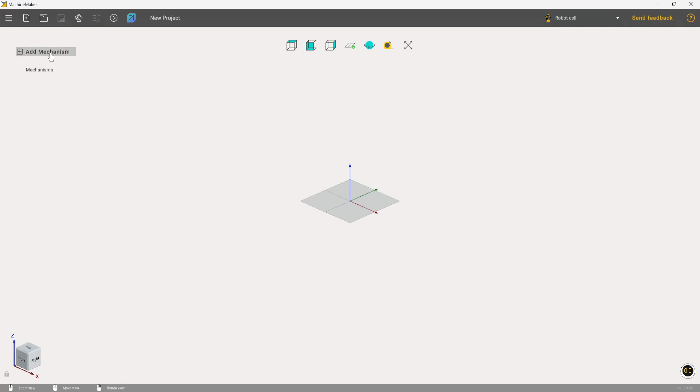For this, we need to launch Machine Maker. After launching, we need to add our robot. We click on Add Mechanism, Robot and Palletizing. Here, upload the file and select the 3D model of our robot.

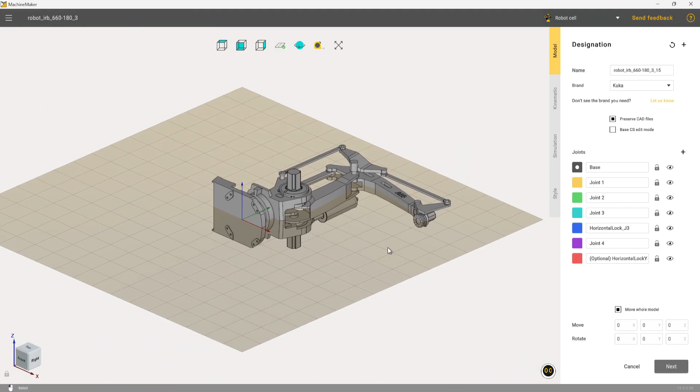If the 3D model loads in this form, we need to rotate it to the orientation we need. Then we will immediately add several axes that we will need later.

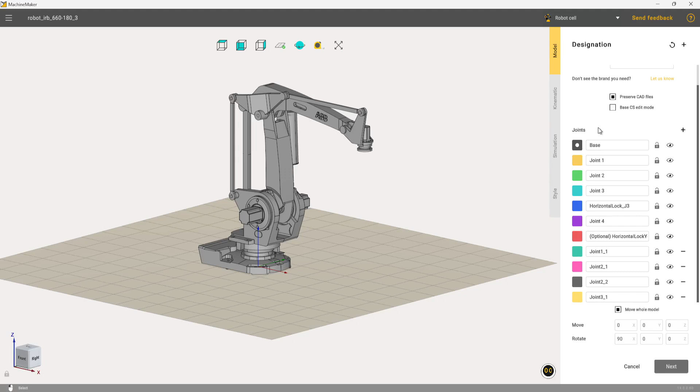Let's start with the base. This will be the bottom part of our robot, then the first axis, the second axis, and so on.

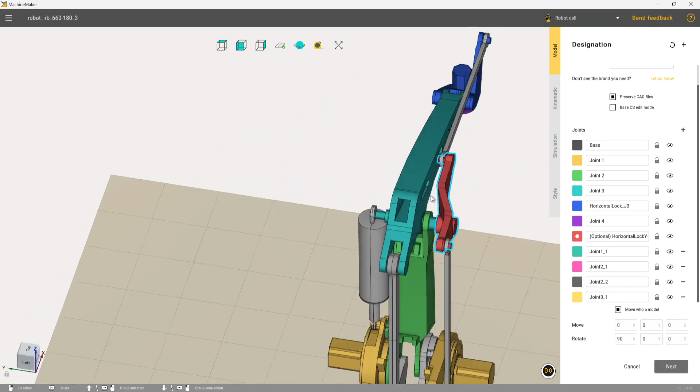After that, we will use the axes that we added. This will be this part of the robot. Then, joint 2.1.

Our robot is basically ready for further work.

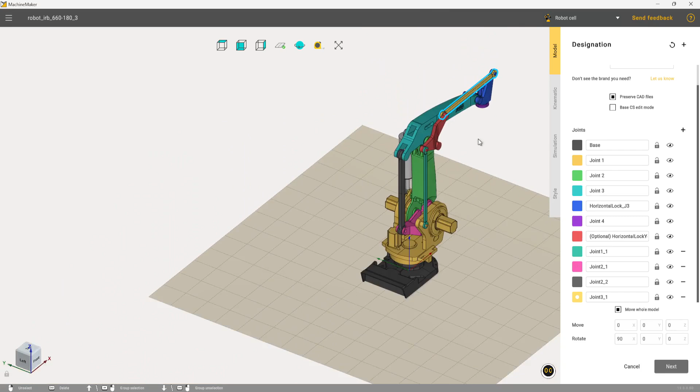We should not forget to change the brand, as we have the ABB brand. We can select it here, click the Next button, and move to the next tab, Kinematics.

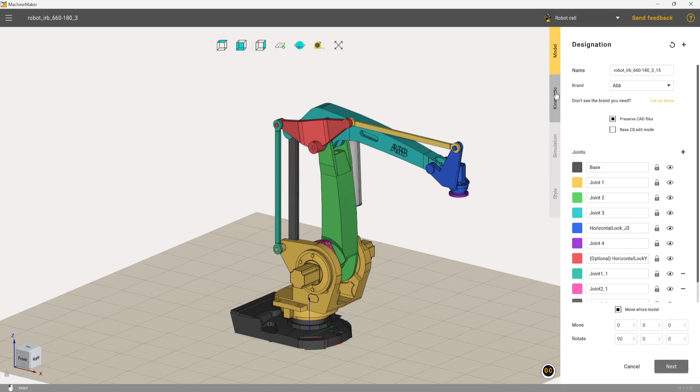In this tab, we need to set the positions of the axes. Usually, technical documentation of the robot is used for setting these positions. In this simple example, we will not delve into this.

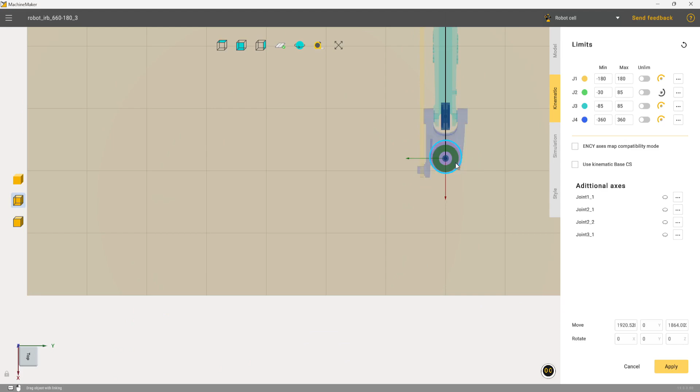We arrange it as follows. Where the mechanism should rotate, we install these nodes.

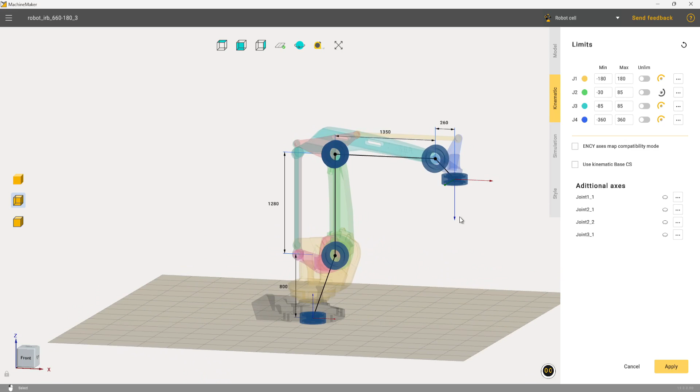The next step will be configuring the axes so that they can rotate sequentially. For this, we need to select Joint1_1, which we defined.

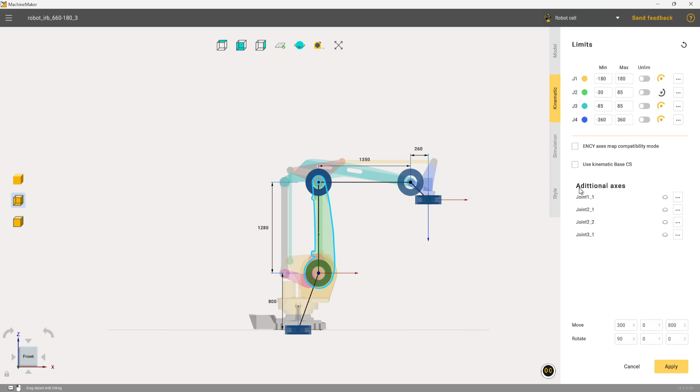There is also a visibility toggle button here, so we can understand which axis we are selecting. For example, when visibility is turned on, I immediately see that this area is highlighted and I am working with it.

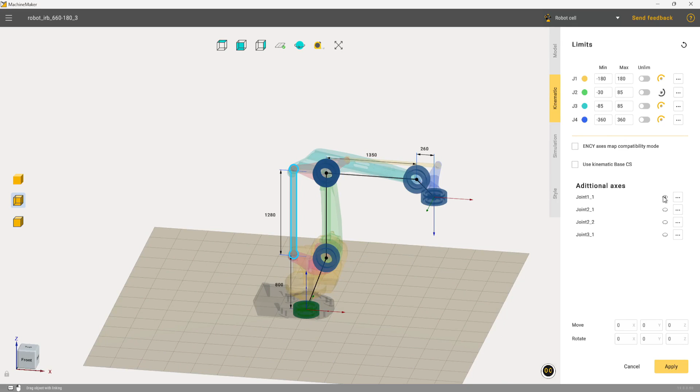To configure, we need to open the parameters and set up our connections, how they should work together. We place our node in the highlighted area.

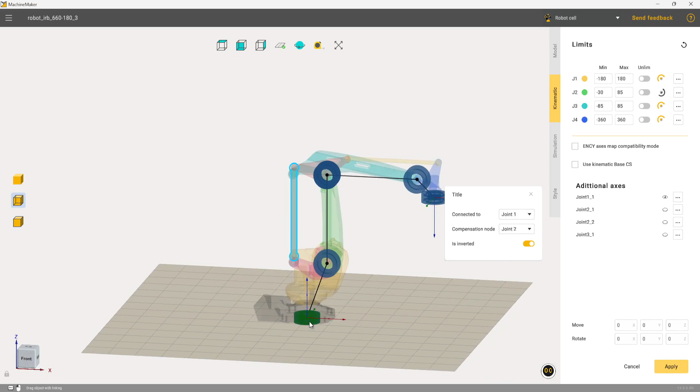For this, we also need to rotate it. We should also pay attention to these arrows, which indicate how our axes will rotate.

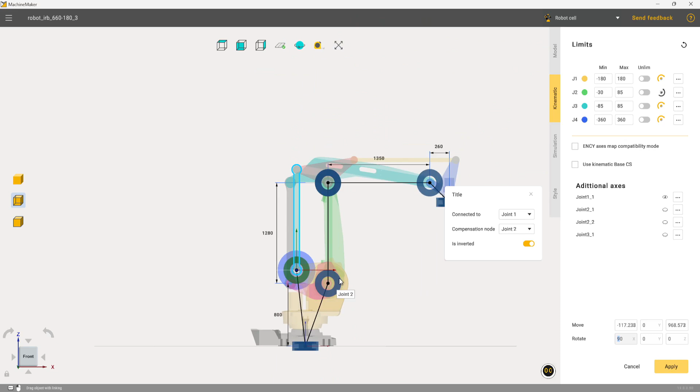Next, we configure the next one. In this case, we will not move the second node. It stays in the same place.

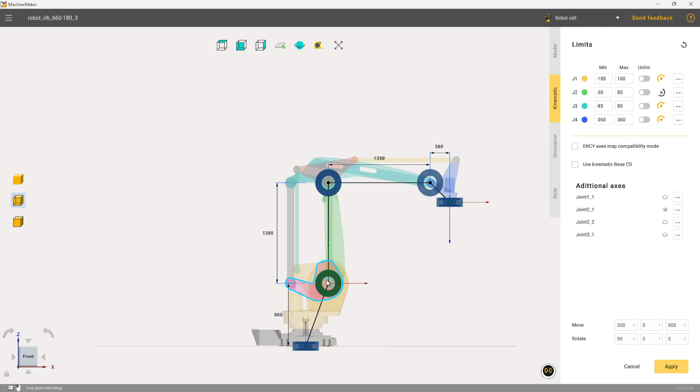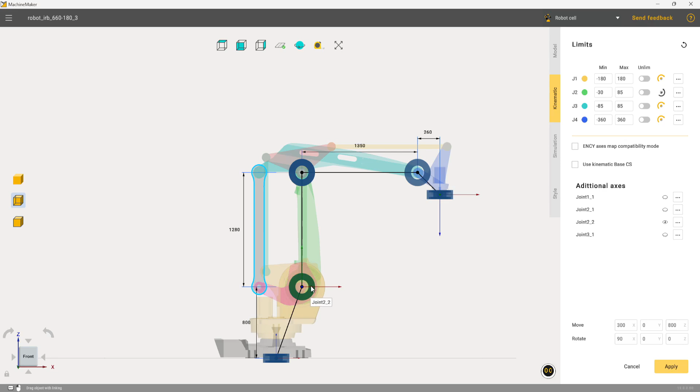Next, we configure and remove the inversion. We turn on visibility and place our node in this highlighted area. Node configured.

After this, we close, turn on visibility, and see how this area has become darker. This means our node is here.

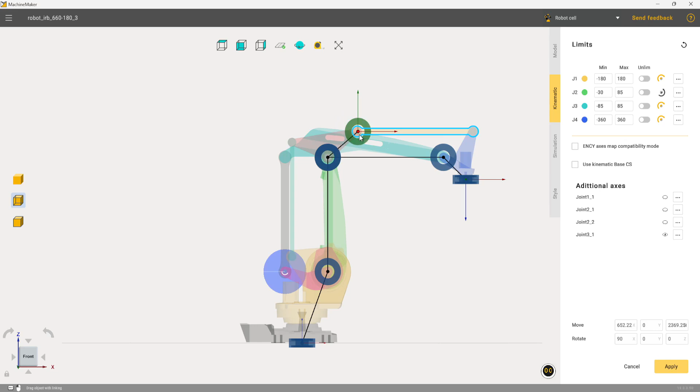We see that our nodes are installed correctly. Next, we move to simulation to check the correctness of our robot's movements.

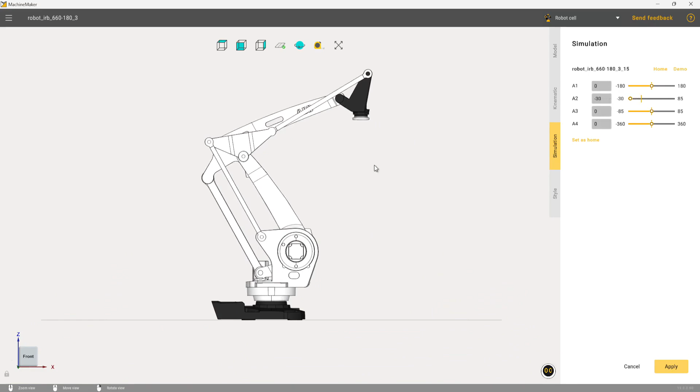We see how the robot has become fully mobile. All nodes are functioning properly, which means that after all the robot's configurations, we can click the Apply button.

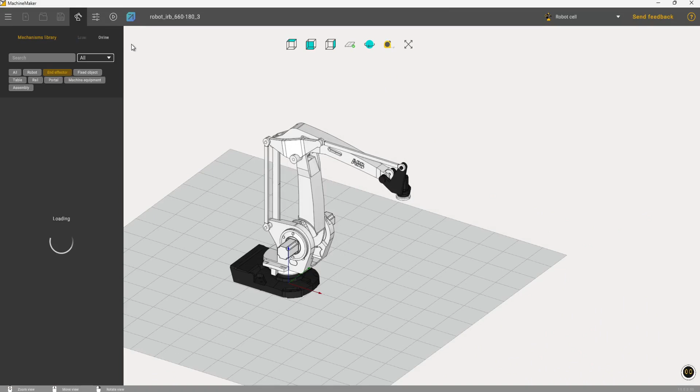Before exporting this project, we need to add a tool for our robot, as we will be moving objects. In this case, we will use this tool from the local library, add it, and now we can export the project.

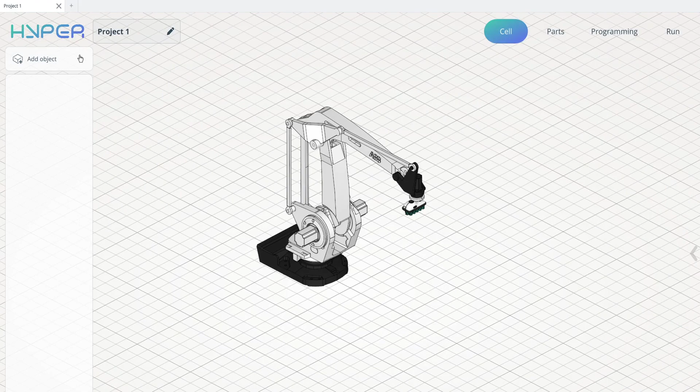After exporting, we will add several objects for our project. This will be a table. It will also be necessary to move it a distance so that the robot can reach it.

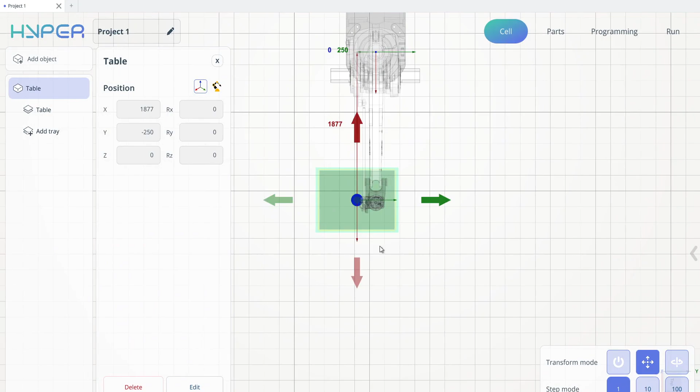We will add a tray to it. In this case, it will be a two-tier tray where we will place boxes.

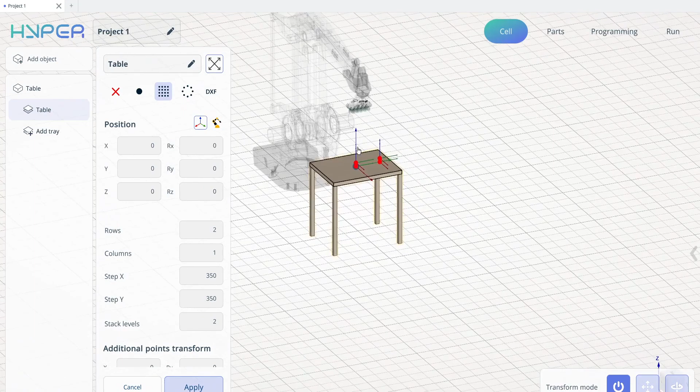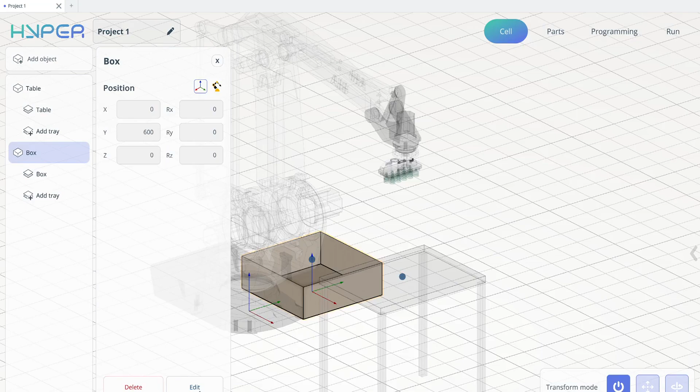The next object will be this box, in which we will place this four-tier tray for holding boxes.

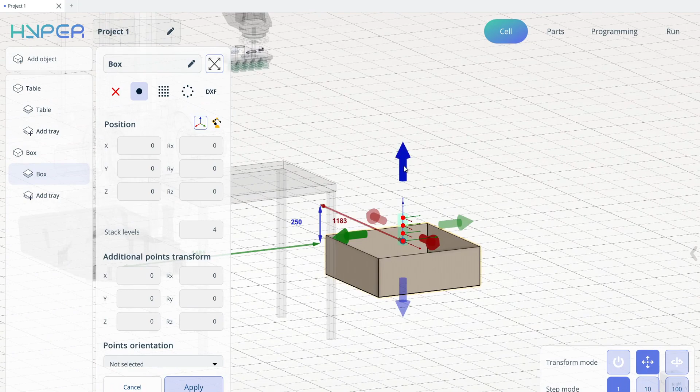We click the Apply button, and since there is nothing more to do on this tab, we move to the Parts tab and add this box.

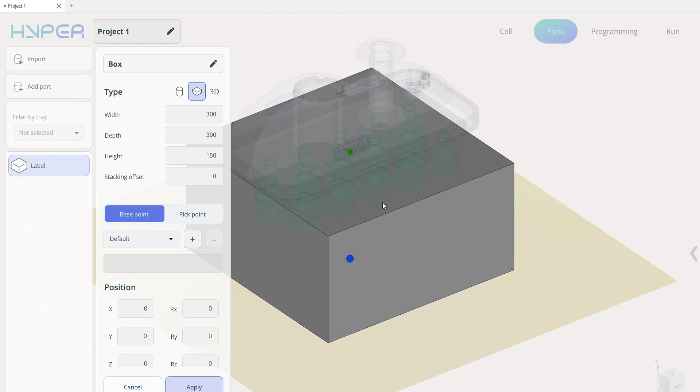We move to the Parts tab and add this box to the table, then move to the Programming tab to set up the program for our robot.

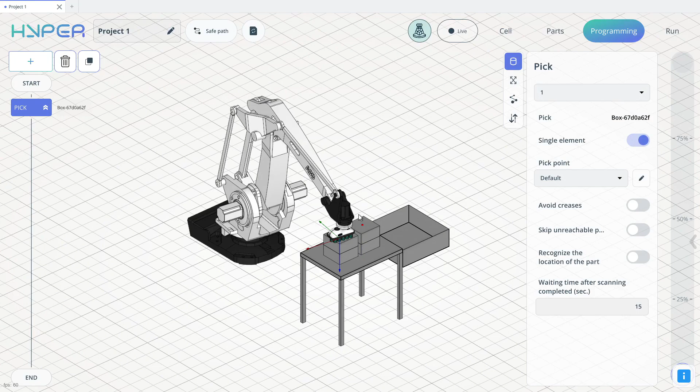The first step will be adding the pick command, which will tell the robot which parts to work with. We see that the robot can reach this area.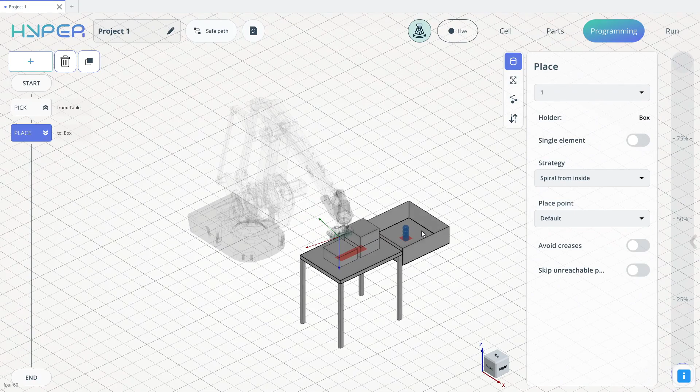Then we will add the Place command to show the robot where to put the parts. So it can reach it, we will move it to this area and try to recalculate the project.

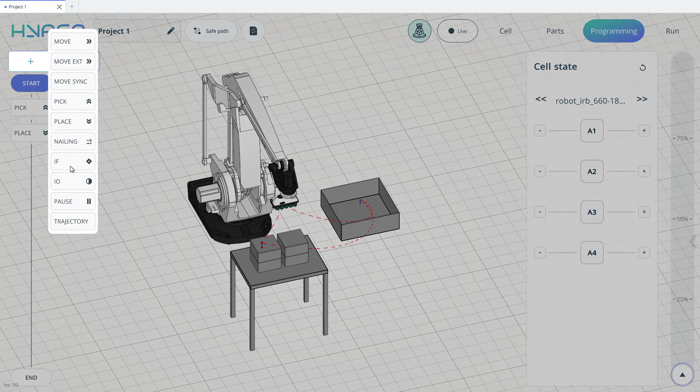This means we only need to loop the program by adding an if condition, where we will say that if this table becomes empty, after this, we need to recalculate the program and see how our robot will work.

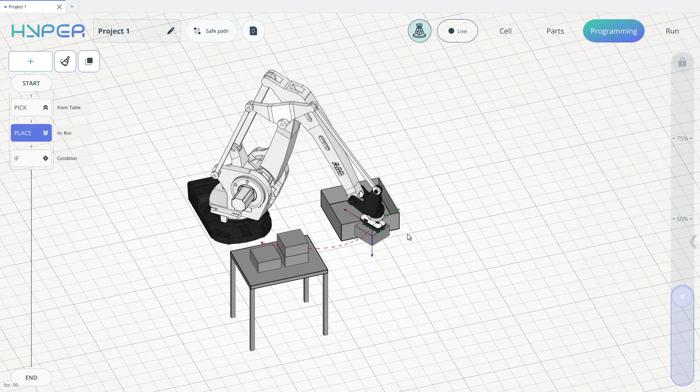In this case, we see how the robot passes through other parts. We have touched on this topic in our other video tutorials.

Our robot is fully functional, with all nodes working, and able to easily move the specified parts.